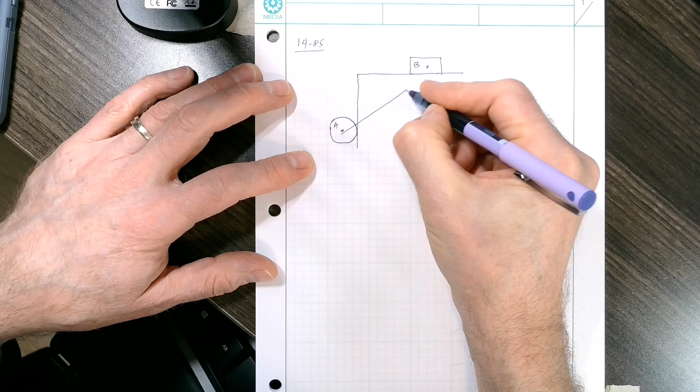And then there's a cliff or whatever. It's an edge like that, and there's a wheel here, a wheel right there, right? Like that, wheel A. And wheel A and block B are connected together with this link arm. Whoops, I missed it. Well, close enough. Okay, like that. And the system, it can move.

There's friction here, okay? In fact, that friction force is given as 20 pounds constant. That's a little bit of an olive branch from the author. Normally, of course, friction force is a function of weight and normal force, and it will also be a function of the tensile force in this angled rod and so on. But that extreme complication, which is what it would be, is headed off at the pass by just saying, look, the friction force opposing the motion of block B to the left is 20 pounds constant.

All right, let's take it. Stop asking questions, just take that. Thank you, okay? All right, the question says, by the way, there's a few known things here. Here's a little known column, okay? Weight of the block is 60 pounds. Weight of the wheel is 80 pounds. Okay. Friction force 20 pounds given.

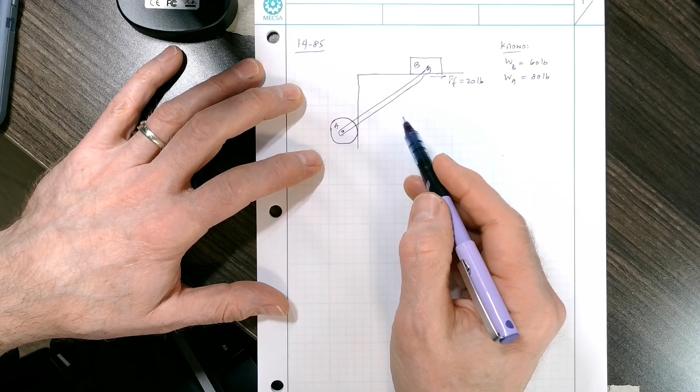Now here's the thing. It's assumed by the author. Well, it's not assumed. It can be shown in the mathematics, but it's implied in the question that this system wants to drop. A wants to drop. There's enough friction and so on, and the weights of the objects are such that if A is released, the system is held here at rest. If A is released, it's going to drop and drag B to the left. Okay, that much is implied.

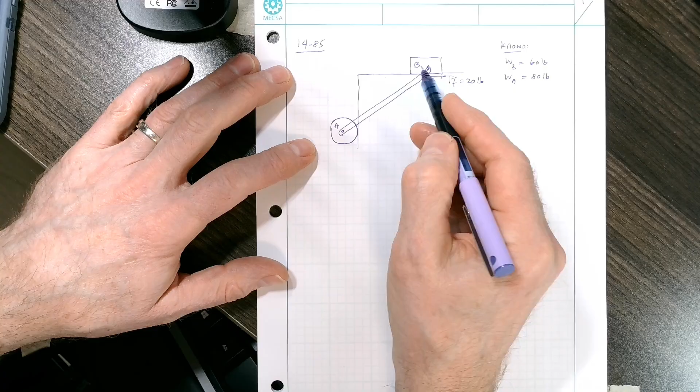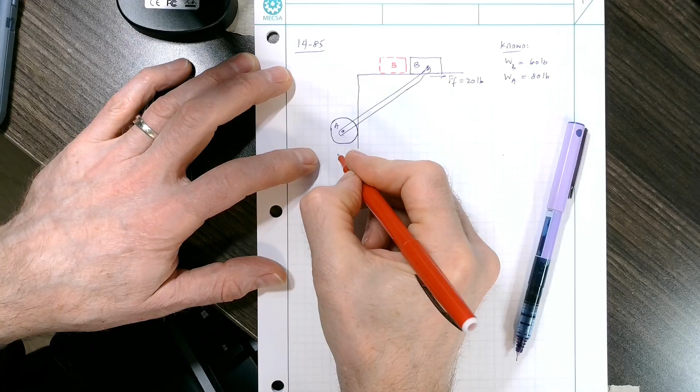In fact, it even says block B ends up to the left 6 inches like this, like that, which means that this thing is now down here a little bit, like that. Okay, and that wall's like that. Now, that's assumed. Although if that wasn't the case, the math wouldn't work out. You get a negative energy value or something, and then you say, oh, negative energy. Well, that would imply that it wouldn't be in motion. That when you release the system, it just sat there. The friction force at B was too great for this to overcome. Okay, but it's not that way. The book obviously is not going to give you a question that has nothing to calculate or no motion. So it does move. Okay.

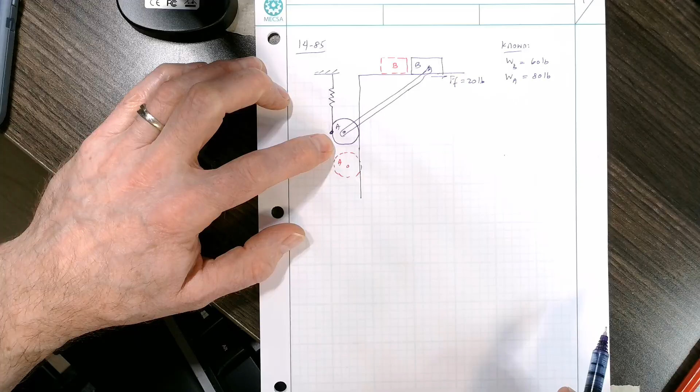But under the heading of weight, there's more. There's a spring here. As you know, there's a spring here. And there's an anchor point, and there's a spring, an extension spring like that. Okay. And now the book shows it wrapping right around, but it's a little bit confusing. I'm just going to show it anchored to the 9 o'clock position. So it's just a steel strap on the end of an extension spring and just screwed into the perimeter of wheel A at 9 o'clock position. Okay. So of course it comes along for the ride. It's going down here, and that attachment point is going to wrap around counterclockwise. It's going to end up being wrapped down here somewhere, and the result is that the spring stretches further. Okay, so the red indicates the final resting place.

Okay. Now, another thing that's otherwise implied in the question is that this wheel is rolling about the contact point with the wall. You don't know that for sure. If this wheel was made of ice and this was a block of ice and everything was wetted with water, there's nothing saying that wheel's going to roll. In fact, it could, in a bizarro sense, when this thing drops, the wheel could actually rotate clockwise because the spring is too strong, and it overcomes whatever minimal friction is at the ice-to-ice interface. Well, there's no mention of the thing being made out of ice. There's no mention of the friction coefficient here.

It's implied, not my favorite thing, but it's implied that the wheel rolls counterclockwise down the wall. Maybe the wheel's made out of rubber. Maybe it's rubber. How is that implied? Because the author reminds you of the mass moment of inertia calculation for the wheel. He says the weight of wheel A is 80 pounds, and oh, by the way, the mass moment of inertia of the wheel can be calculated from 1/2 mr squared.

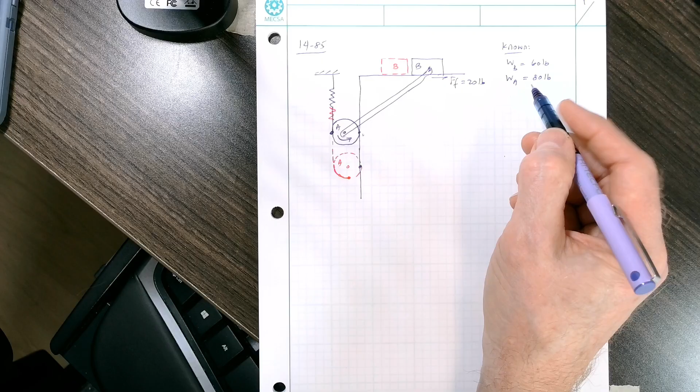Well, that right away is the author's way of saying, wink, wink, nudge, nudge, it's going to rotate. You don't need the mass moment of inertia for something if there's no rotational motion. So it's implied that the wheel rotates, counterclockwise, no less. Again, the full analysis of this in the absence of any friction coefficients would be pretty pronounced, okay? But we're going to take it with what's implied by the author. Not my favorite setup for a question, but okay.

All right. The other thing, besides the friction force being constant 20 pounds, there's one other little nice thing the author does, and that is that we're going to neglect the weight of the link. Neglect link mass. That's huge because the link is in plane motion. It's simultaneously translating slightly down, a very little bit, and rotating counterclockwise. But we don't have to account for that plane motion because the link has no mass. If the link was very lightweight, it's just in tension, you could just make the link out of a little strip of aluminum. You could argue that's not an invalid thing.

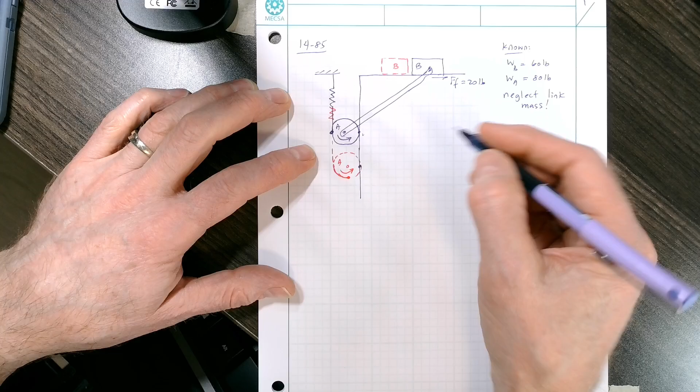So, all right, some dimensions to go on here. This initial triangle is a right triangle, and it's 10 inches tall by 24 inches that way. Then it says the block. Here's the RTF statement: find the velocity of B after it has moved 6 inches to the left. So here's the 6 inches. Another right triangle, and the link would look like this now. Well, 6 inches to the left, that means this is 18 inches. That's all we know for sure there.

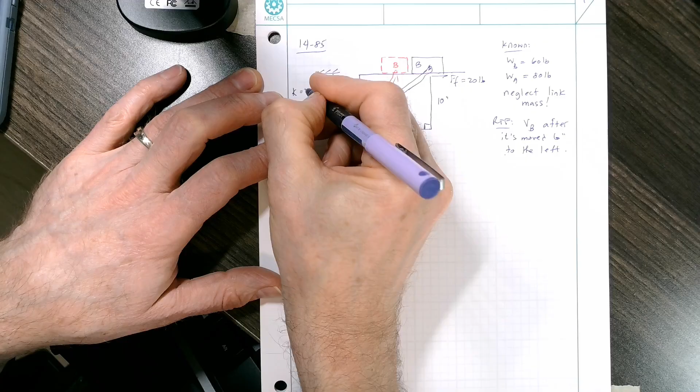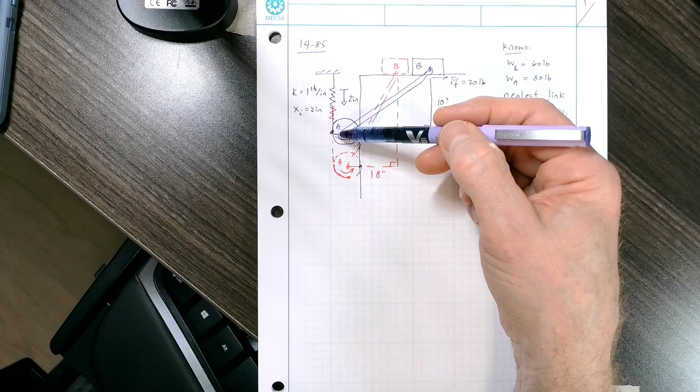One other bit of information: the spring has a spring constant of 1 pound per inch. K equals 1 pound per inch. And it's initially stretched. X initial is 2 inches. So some work has been done initially to stretch the spring 2 inches, and then it's further stretched as A progresses down the vertical wall and starts winding this strap around itself. It stretches the spring further, but we don't know how far. So the very first thing we have to do, which is take stock of what exactly we're up against, is a geometry analysis.

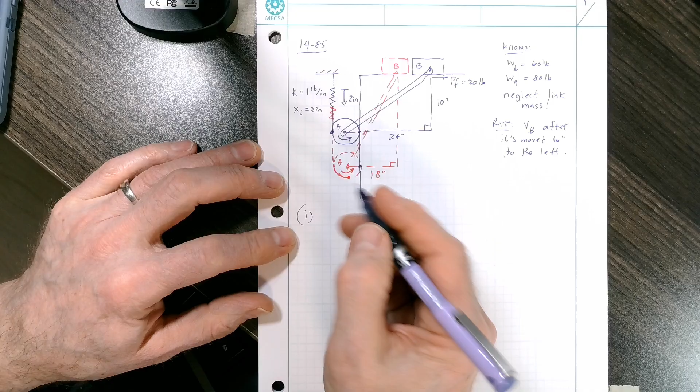First of all, the length. That's the hypotenuse of the triangle. It's common between both triangles, the red and the purple. It's the length of the link. It's the square root of 10 squared plus 24 squared, which equals the square root of 676, or 26 inches. Then the second triangle. Now what I want to know is this distance right here, because that is the change of potential energy of the wheel. We need that to track the energy. Also, it has something to do with how far the spring stretches.

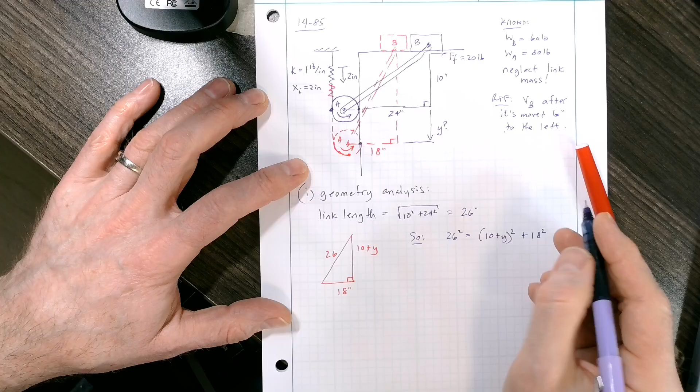So that is the red triangle. This is 18 inches, 24 less 6. This is 10 plus y, if I call that y. And this is 26 inches. So we have 26 squared equals 10 plus y squared plus 18 squared. So 10 plus y equals the square root of 26 squared minus 18 squared. You don't have to say 10 plus y; you can just figure out the triangle height. But here we go: 26 squared minus 18 squared, square root, equals 18.76 inches. Therefore, y is 8.76 inches. That's the distance that wheel A drops.

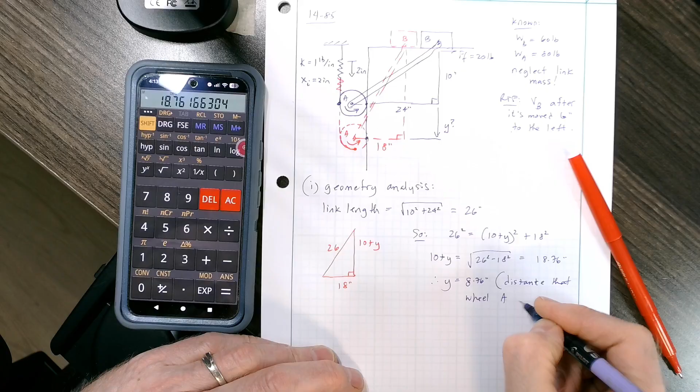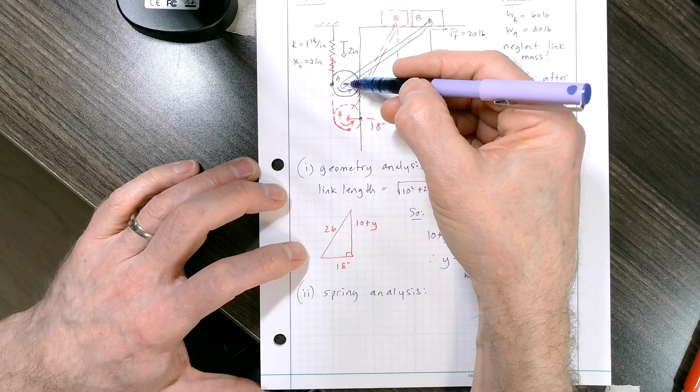All right. Well, you'd think the question's over because that was a bit of work just to get there. But it's not over. Spring analysis, okay? The spring is attached to the 9 o'clock position on the wheel. Relative to a stationary observer, the wheel is rotating about the 3 o'clock position, not the center axle, the contact point. So there's an easy way and a hard way to do this. The easy way is to realize that with the wall like this, the wheel at one point and the spring attached here, and then the next point the wheel is down here and the spring's attached here. If the wheel moves 8.76 inches down, then the spring moves twice as far, okay?

So by observation, and that would be known if you did some wheel analysis, the top of the wheel has to move twice as far as the center. But here it is with my attempt to do it with the S equals R theta analysis. Think of a link right here, a link like that, and another link in the middle, the smaller link.

Let's draw it over here. Let's do the wheel like this. There's the rotational point. Here's one link to the center of the wheel, and then imagine another pinned link that goes all the way to the other side like this. So you've got two links. Link 1 has a radius of the wheel radius, which is 9 inches. Link 2, the red link, its length is 18 inches.

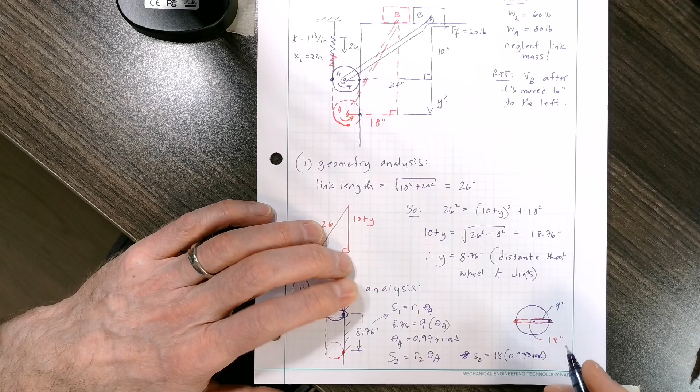That's common for the red link. The red link also moves through the same theta A. So S2 equals R2 theta A. S2 is unknown, R2 is 18 inches, and theta A is 0.973 rad. And we are going to end up with the same number initially. If you know your wheel stuff, you realize that if this wheel moves down 8.76 inches, the perimeter moves down twice as far. 8.76 times 2 is 17.52 inches. Well, here it is in mathematics.

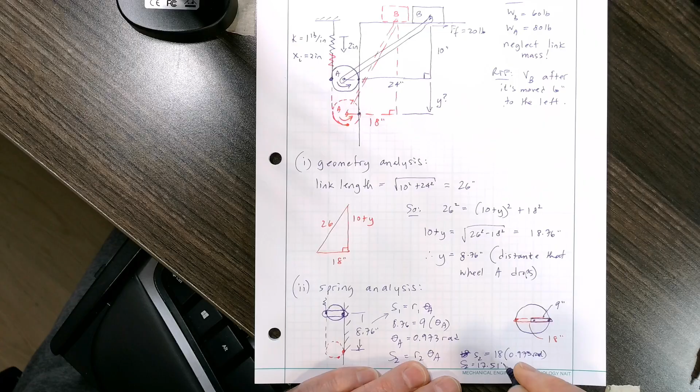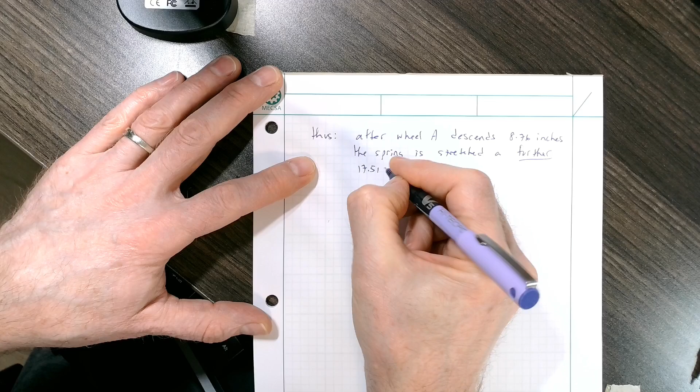S2 is 18 times 0.973, which is 17.51 inches. S2 equals 17.51 inches. In other words, the spring is stretched. So after wheel A descends 8.76 inches, the spring is stretched a further 17.51 inches, because it's already stretched 2 inches to begin with.

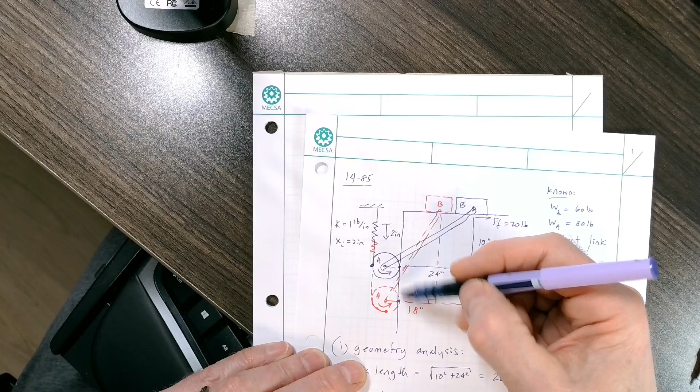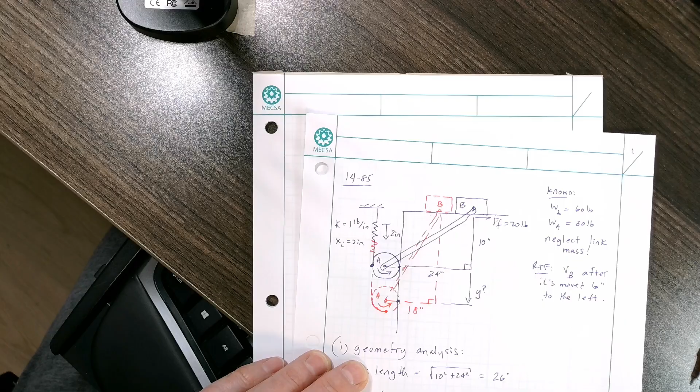Again, a 2-to-1 ratio, and that holds for all wheels, of course. It doesn't matter what the diameter or radius is. Put another way, when you drive down the street, the axle of your car might travel 1 kilometer, but the top of the tire has traveled twice as far because it has to roll around and catch up to the road again. That's sort of a Timothy Leary moment, but yeah. All right. Are we ready to do dynamics yet? Because we're really just doing kinematics and geometry right now.

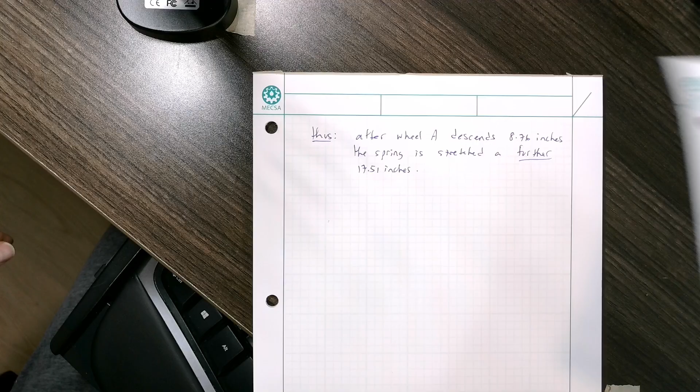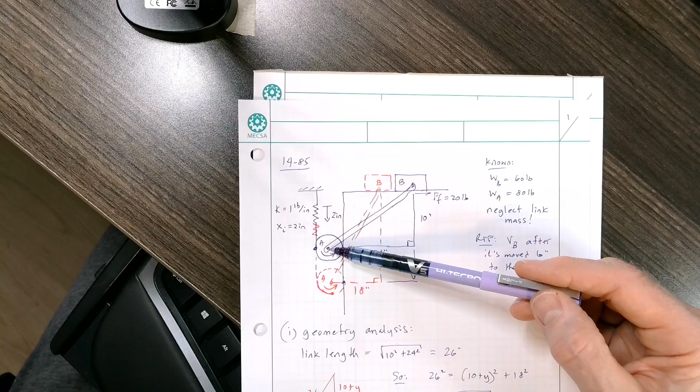Okay. Step number 3. Initial energy. Here's the energy balance, conservation of energy. Here's the system. Initial energy equals final energy. Initially, it's all just sitting there. There's no motion, so there's no kinetic energy initially. But A has a tendency to drop vertically. B will not drop, so there's no change of potential for B, but there's a change of potential for A. So initially A has energy, and then it drops down to some datum, and all of its energy is used up.

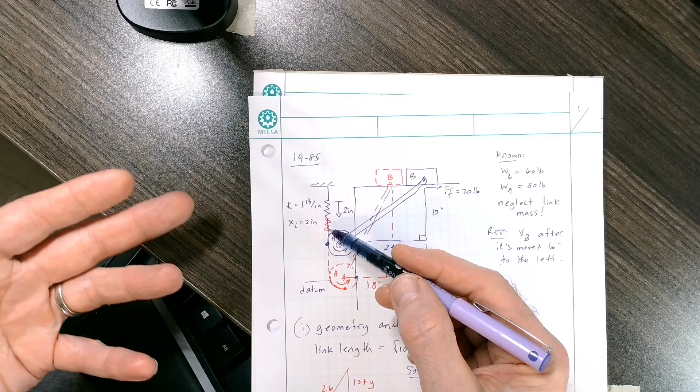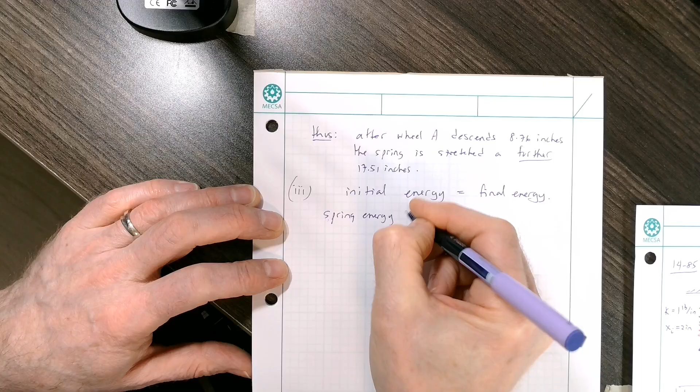Also, there's an initial spring length. It took work to stretch that spring 2 inches. That work is energy in the system. If you suddenly cut the strap that holds the spring, the energy would be released and the spring would snap. That is energy initially. So the initial energy is spring energy plus potential energy of A.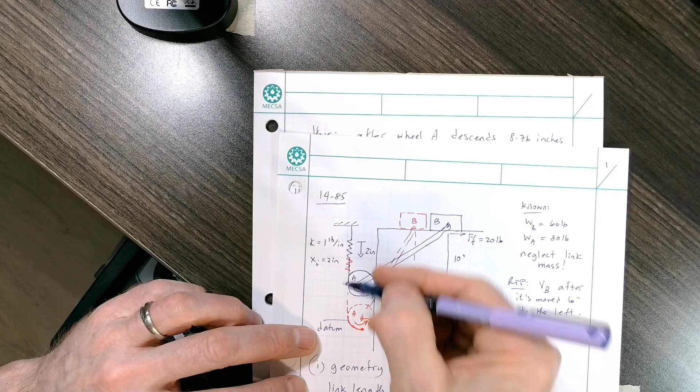The final energy, well, this thing moves down, it's rolling. Rolling and moving down, that's two different forms of motion. Plus B is moving to the left. Plus there's friction. Plus the spring. It's just the gift that keeps on giving. Spring energy plus potential energy equals kinetic energy of A, linear. It's moving straight down. It's actually in plane motion. It's a classic wheel, plane motion.

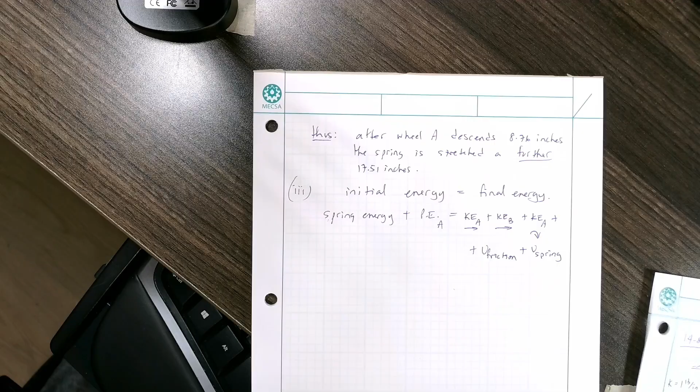Kinetic energy of A, I drew it to the right, but it's actually dropping. Plus kinetic energy of B, which is linear. It's moving to the left. I'm just showing an arrow meaning linear. Plus kinetic energy of A in the rotational sense. A is in plane motion, so it's got both linear and rotational. Plus, here it is, the work of friction plus the work put into the spring. This is a pretty doozy question. Five things.

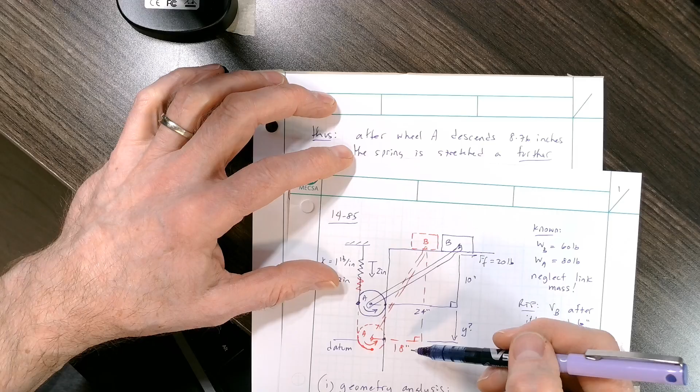It doesn't say this thing comes to a stop. It says what's the velocity of B when this moves to the left 6 inches, so when this thing drops 8.76 inches. Well, it's still moving. So it's got rotational kinetic energy, linear kinetic energy, the spring is stretching, and work is being done against friction. Five different things: 1, 2, 3, 4, 5. All right, a few things out of the way.

Spring energy is 1/2 kx squared. You know that. So here we go, 1/2 kx squared. Plus potential energy, well, that's weight times height, weight times, I'll just call it Z. Whoops, not plus, equals.

So that's those two terms right there. That's the spring energy, potential energy. Kinetic energy linear of A, well, that's 1/2 mv squared, 1/2 m_A v_A squared, right? By the way, this is the weight of A. Kinetic energy linear of B, well, that's 1/2 the mass of B, the velocity of B squared.

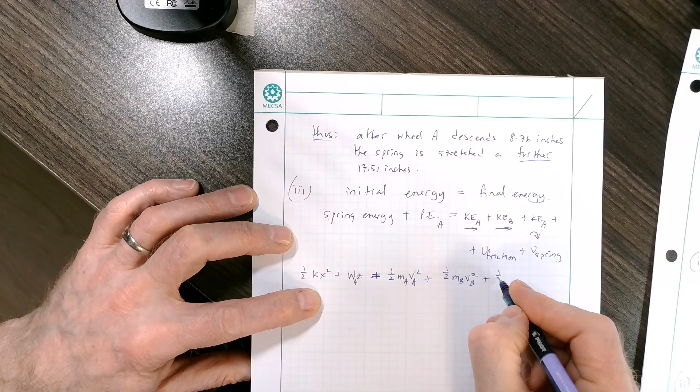All right. Kinetic energy angular of A, that's 1/2 I omega_A squared. Plus friction force, well, that's force of friction times distance, which is actually 6 inches. We know that distance. And then the work of the spring, and it's just more work.

It's just 1/2 k x initial squared, and x initial is 2 inches. And this is 1/2 k x final squared. That is borderline root canal level, but it is what it is. All right. We need k, we have x initial, we have x final, that's 17 and a half plus 2, but masses are easy enough.

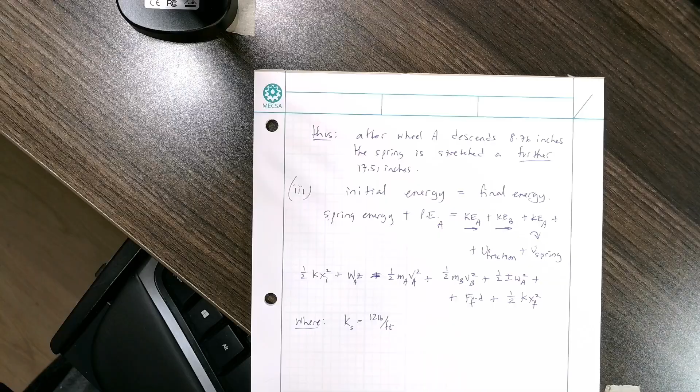Okay, let's do a couple things here though. K spring, this value, it says 1 pound per inch. Well, let's normalize everything in feet, so it's 12 pounds per foot. If it takes 1 pound to move 1 inch, it takes 12 pounds to move 12 inches, aka 12 pounds per foot. The mass moment of inertia of the wheel, they give you the equation 1/2 mr squared, right?

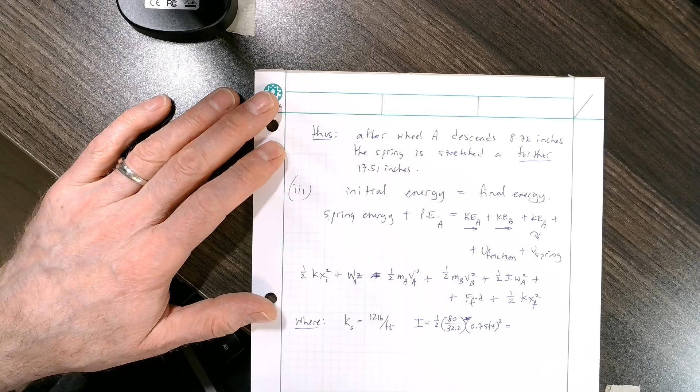So 1/2, the mass is the weight of the wheel divided by gravity, times radius squared, 0.75 feet squared. Okay, so let's get that. So some trivial laundry list things. Mass 80 divided by 32.2 is 2.48 times 0.5 times 0.75 squared is 0.699 foot pound second squared. That's the moment of inertia of the wheel.

X initial for the spring is 2/12 of a foot. It's moved 2 inches initially, and x final for the spring is 2 plus 17.51, an easy one to mix up, but it's 19.51 twelfths of a foot. The final extension of the spring is 19.51 inches. So don't make a little oops there. Other things we can clean up here. So that handles the k and the x initial.

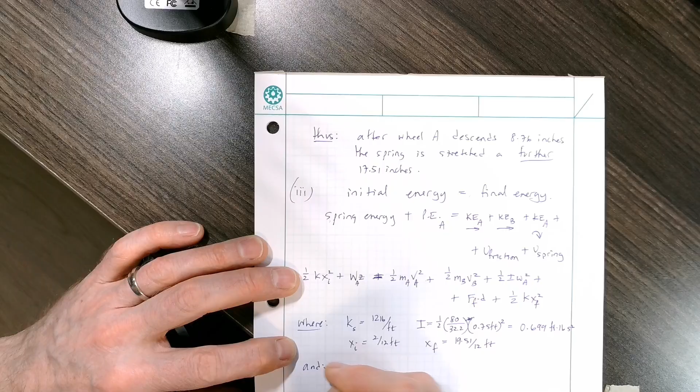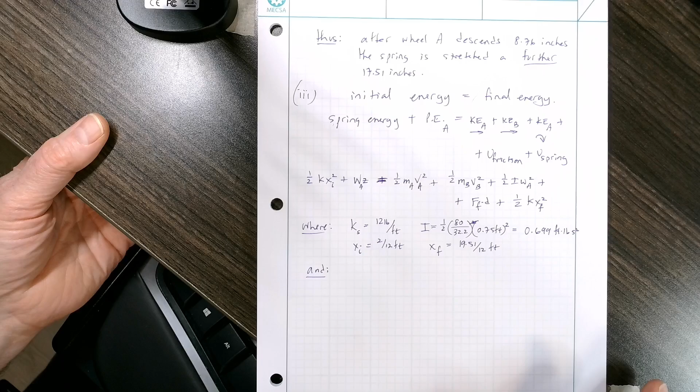We have to relate the velocities together. All right, omega_A. How to do this? It's a floating link. Floating link analysis to determine V_A. Omega_A is not omega of the link. Omega_A is omega of the wheel A, so I don't need to worry too much about that, but it looks like this.

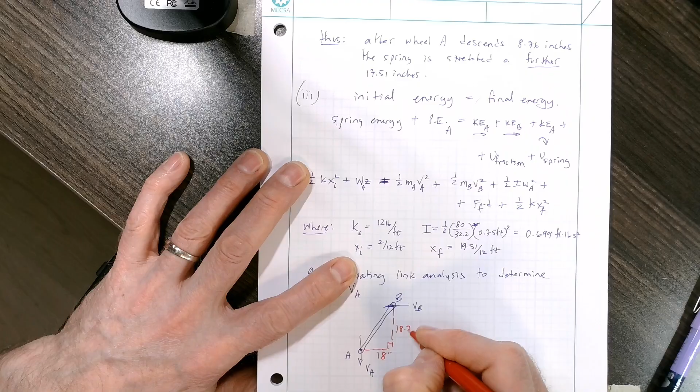Here's the link at just some arbitrary angle. V_B is straight to the left. Point B is up here, straight to the left. V_A, of course, is straight down, right? Here's point A. The dimensions here are at the final. Here's the red ink to indicate the final dimensions. Here's the triangle that defines that link. This is 18 inches, and this length here is 18.76 inches. That's the height of the triangle. And if you care about it, this is 26 inches. So there's the velocity triangle.

And you can relate V_A to V_B with the instantaneous center. Here's the instantaneous center of rotation for that link. The claim to fame of the instantaneous center is that for a given body, that's the center of rotation of the body. That's its ground zero, if you will. It's orbiting around that center right now, and all velocities on the body can be related to the IC with perpendiculars.

So the common thread here is the angular velocity of the link. The link is rotating this way, omega, about the instantaneous center. It says that the velocity of A is r omega, r_A omega. And the velocity of B is r_B omega, and the omegas are the same. This is the same omega.

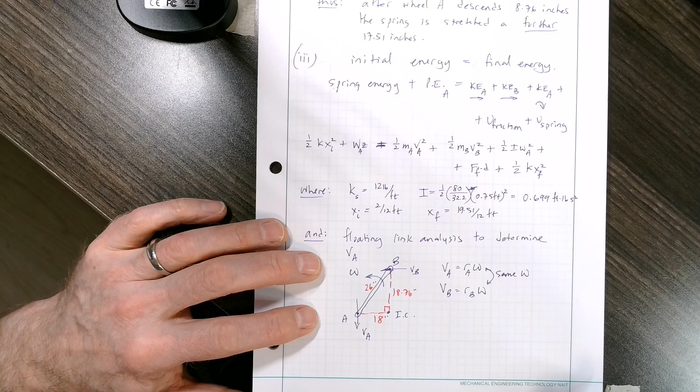So then you can set up a ratio. You see that? Okay. So you can say VA. Now what am I doing again? I want to eliminate VA. I don't want to know VA. I want to know VB. I want to express VA in terms of VB.

So I'm going to say VA equals RA omega. Well, omega is VB over RB. So I just took these two, made one equation out of it. That's R. This is V. That's R. All right, so we have VA equals RA, the radius for the instantaneous center, is 18 inches. VB is the unknown, of course, and RB is 18.76.

Okay. Therefore, VA, for purposes of substitution, is 18 divided by 18.76, 0.959. The velocity of A is 0.959 that of VB at the final, right? At the termination of the question when A has dropped 8.76 inches and so on. VA is 0.959 VB. That's going to get subbed in up here, this big old equation right here, okay?

We have got our ducks in a row. You may not believe it, but we do. Okay? Again, reminder. Initial energy, initial spring stretch 2 inches. Well, we know K, we know XI is 2 inches, 2/12 of a foot. Down here, potential energy of A, sitting there, trembling, waiting to drop. That's the weight of A times the distance through which it drops. That's an easy one. 80 pounds times 8.76 inches.

Right? All that energy then is transformed into linear kinetic energy of A, 1/2 mass of A VA squared. Well, we're going to do that sub down here. We're going to put this VA right there, and that'll make that a function of VB squared. This whole thing, 0.959 VB, will have to be squared there. Plus kinetic energy of B, moving to the left, 1/2 m VB squared. Well, that's what I want to know. That's the unknown. It's going to be here and here. Plus the angular kinetic energy of the wheel, which is 1/2 I omega A squared. We've got I figured out, 0.699.

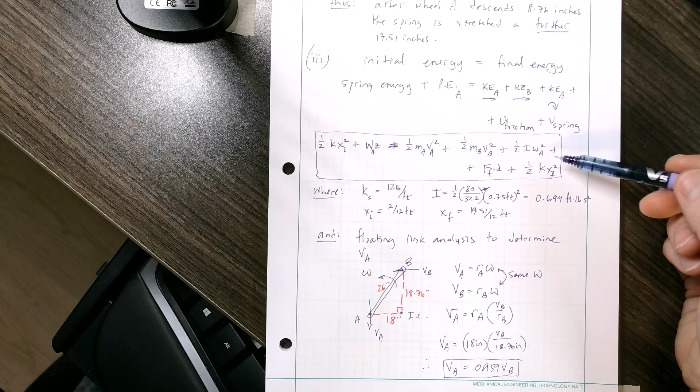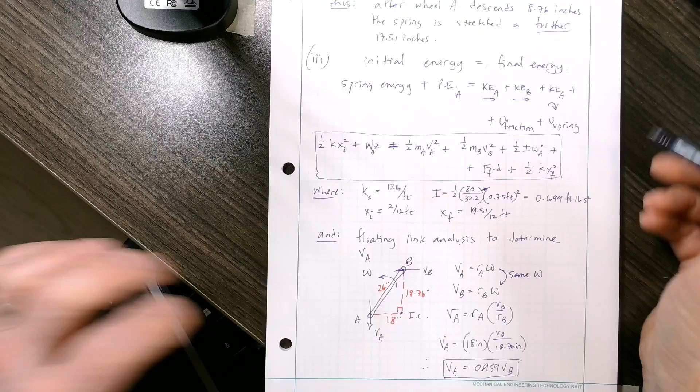Okay. Force of friction, 20 pounds times distance, 6 inches. That's easy. That's as easy as the potential energy. And then the final spring energy is 1/2 K times the total extended length squared. Okay. All right. This is page 2. Let's get the omega for the wheel.

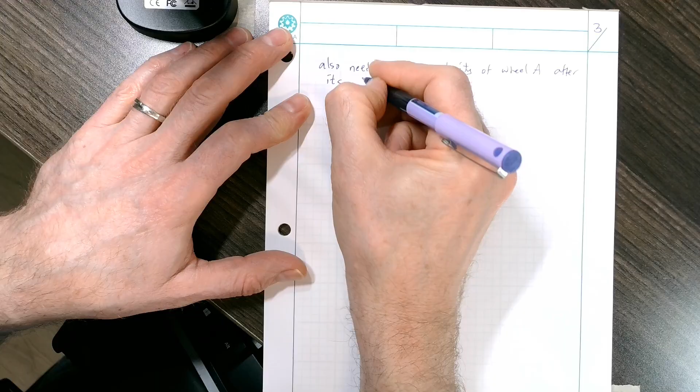Okay. Page 3. Also need angular velocity of wheel A after it's dropped 8.76 inches. Okay, that's not the same as this omega. That was the omega of the link. They're not the same. They're completely different bodies. Okay.

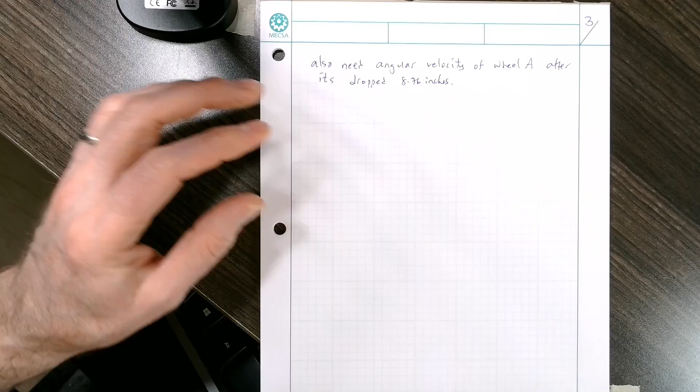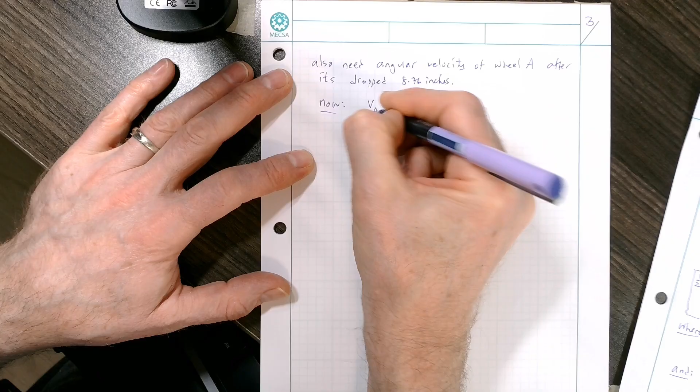Omega A can be related to the velocity of B. All right. Through this, we have this already. Oh, wrong page. Sorry. We have this already. VA is 0.959 VB. Well, let's express VA in terms of the wheel speed. Okay. So the velocity of A, the linear velocity of A, the wheel, is equal to RA omega A. Right?

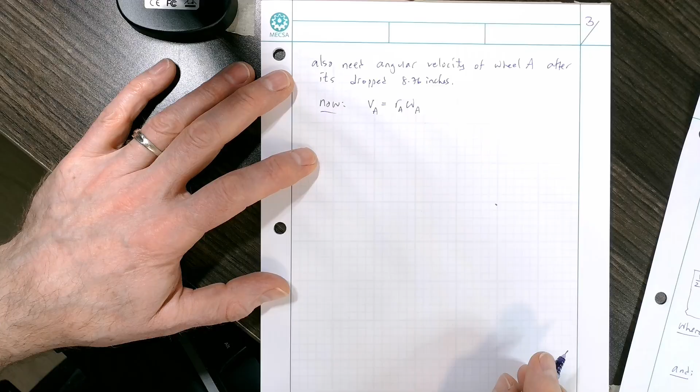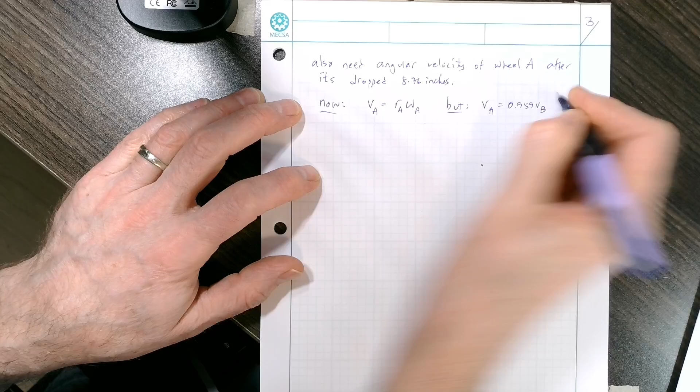But VA equals 0.959 VB. So I'm doing a substitution here. So we have this 0.959 velocity of B. That's the sub. That goes here. Equals the radius of A. Well, the radius of A, the wheel radius, analyzing this wheel as it rolls down this wall, okay, the radius is 3/4 of a foot. Not the diameter, the radius is 9 inches, 3/4 of a foot. Okay, just a simple rolling wheel analysis. The radius of A is 0.75 feet.

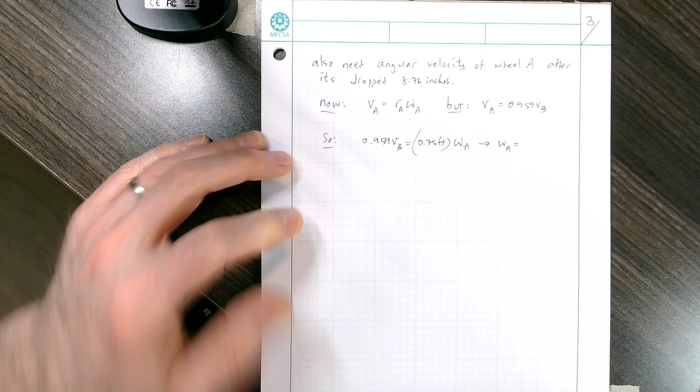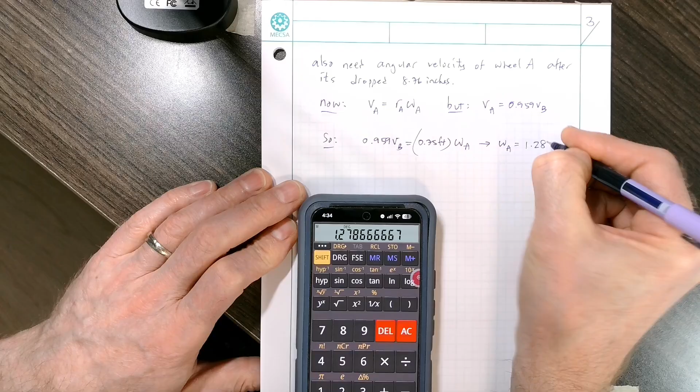Okay, omega A. Omega A equals, do the math there, 0.959 divided by 0.75. 1.279, 1.28 VB. All right, I forgot to do that on the previous page. That is going to go right here. Okay, are you with me? I'm not sure I'm with me, but all right.

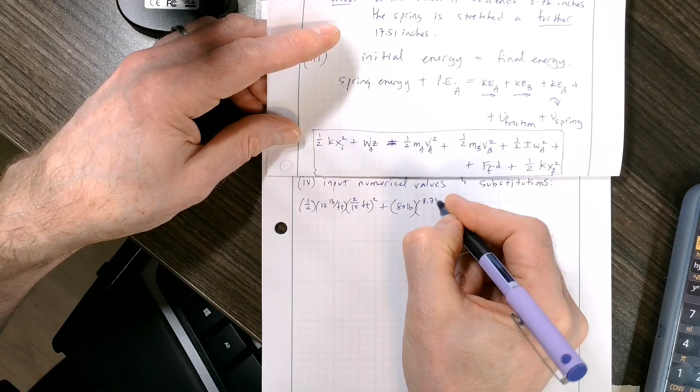Plus the weight of A, which is 80 pounds, times the distance through which A drops. That's the Z distance. That's 8.76 twelfths of a foot. Okay, that's the initial energy.

Okay, that equals, and the final energy is going to be a bit of a mess. I'm going to put it down here. Here's the final energy. One half times the mass of A. This is the linear kinetic energy of A. Mass of A, 80 over 32.2. I'm going to leave off the word slug right there. Velocity of A, oh, there's the first sub. That is 0.959 VB, 0.959 VB all squared.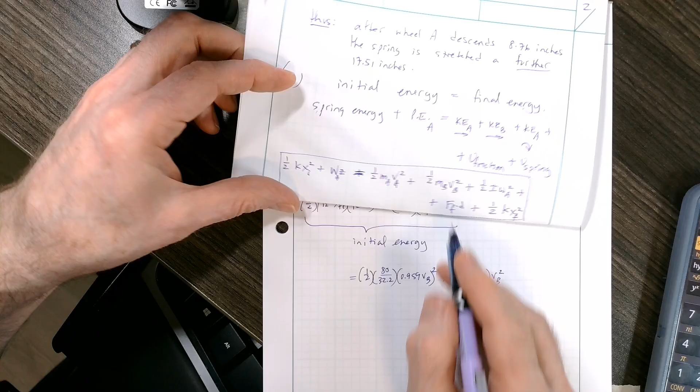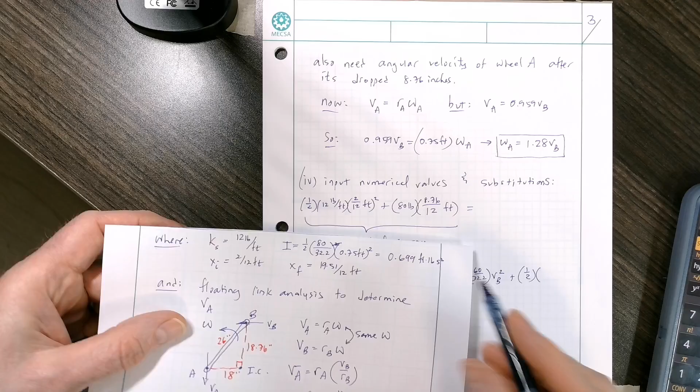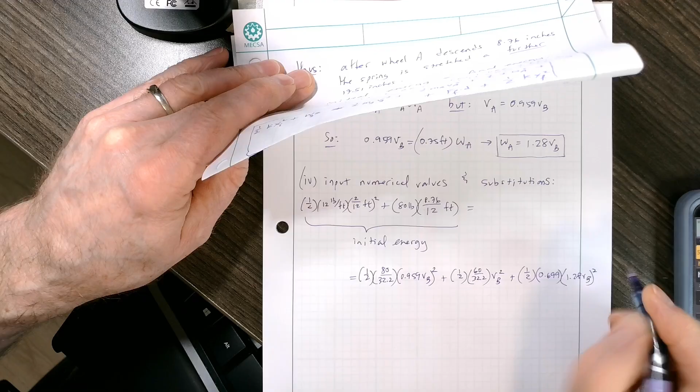0.699. I'm going to leave off the units. 0.699 foot-pound second squared. One half I omega A squared, omega of the wheel, 1.28 VB, all squared. There's the next sub. So that's one half I omega A, omega of the wheel, all squared. One half mass moment of inertia of the wheel, omega A, which we've gone to the trouble of expressing in terms of VB, all squared.

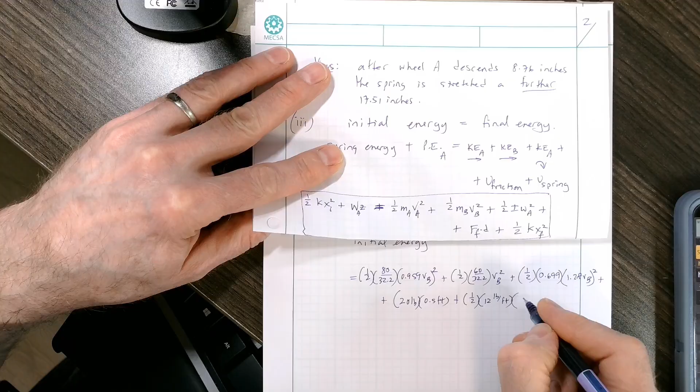That's three kinetic energies, 1, 2, 3, plus the friction force, 20 pounds times 6 inches, 0.5 feet. That's the friction energy. Notice there's no such thing as a negative energy. It's just all positive. It's one easy thing about energy. Plus the final spring force, 12 pounds per foot, one half, X final, 19.51 twelfths of a foot squared.

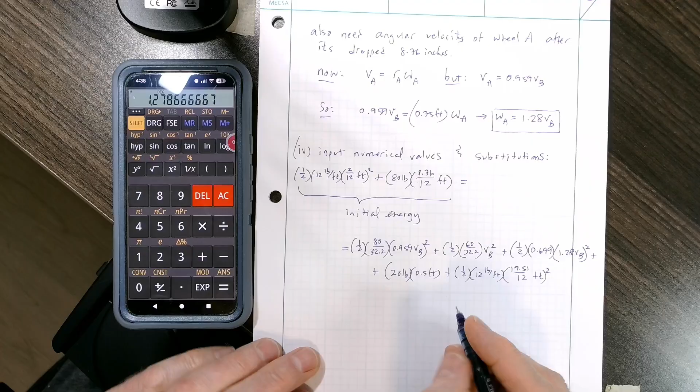Holy smokes. Not going to lie. Here's the initial. I'm going to start up here and do some calcs. 2/12 of a foot. Here we are. I'm just doing these calcs and I'll write the numbers down here. 2/12 of a foot squared times 12 times 0.5. Initial spring energy 0.167 foot-pounds in the spring. Plus initial potential energy, 8.76 twelfths of a foot, 0.73 times 80 pounds, 58.4.

So an awful lot of energy, 58.4 foot-pounds of potential energy in the block. Okay, that equals the kinetic energy of the linear motion of the wheel. 0.959 squared times 80 divided by 32.2 times 0.5. 1.142 VB squared foot-pounds of energy, plus the linear kinetic energy of block B.

That's the mass of B, 60 divided by 32.2 times 0.5, is 0.932 VB squared, plus the rotational kinetic energy of wheel A. All right, that's 1.28 squared times 0.699 times 0.5, is 0.573 VB squared, plus the work of friction, 20 pounds times half a foot is 10 foot-pounds into friction, plus the final spring energy, 19.51 divided by 12, 1.626 feet squared, times 12 divided by 2, 15.86 foot-pounds in the spring.

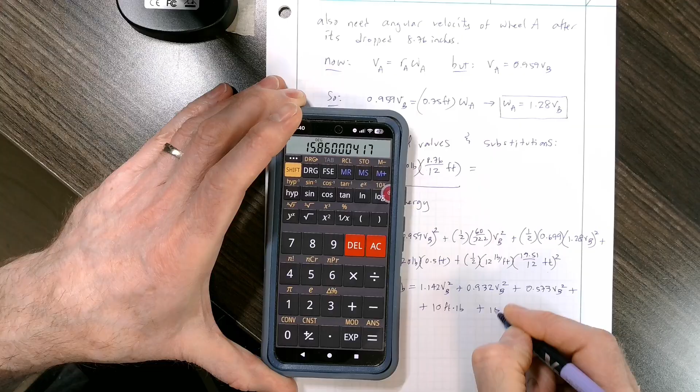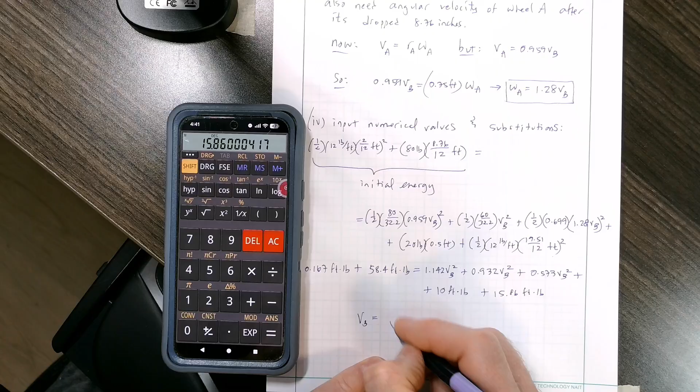So the spring doesn't start off with a whole lot of energy, 0.167, but it ends up with a lot of it, because you're squaring the stretch. The further you stretch it, the more it takes. So I think that's good. VB equals, oh yeah, simple calc. Here it goes. Add up all the constants. VB equals the square root of 0.167 plus 58.4 minus 10 minus 15.86 is 32.707.

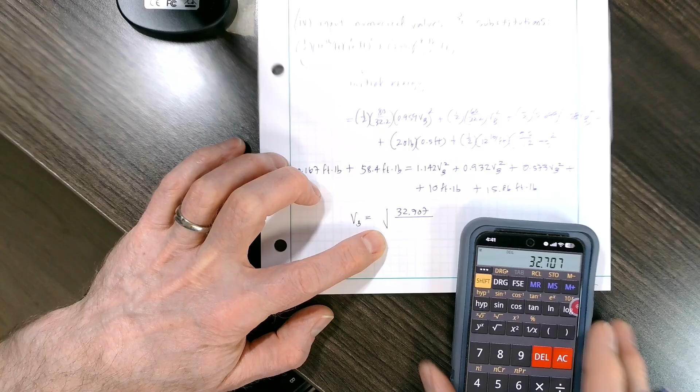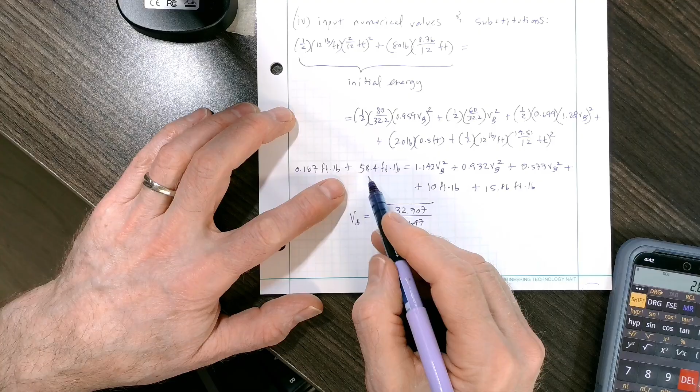That's the constant. And then divided by the constant in front of the VB squared. I'm not spending a lot of time on the math here. In front of the VB squared, I have 1.142 plus 0.932 plus 0.573 equals 2.647. So again, I collected the constant on the left, VB squared is on the right. I flipped them. I put VB here as a square root of that. Invert that times 32.707, square rooted, 3.52. VB is 3.52 feet per second to the left.

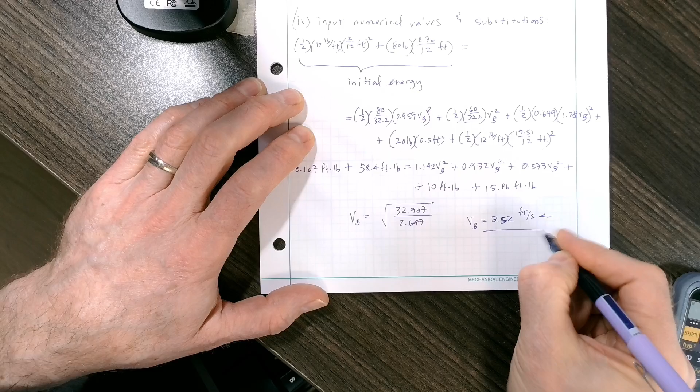I hope you enjoyed that. That's sarcasm, but there is so much going on in this question. If you can just understand bits and snips of it, that would be good. To be honest, if I did this on an exam, I doubt I would get the right answer. I would probably forget something or make an incorrect calc error somewhere. But that's a 3-page example. Very challenging, got to tell you. It's got everything in the kitchen sink as far as energy and kinetics and so on.

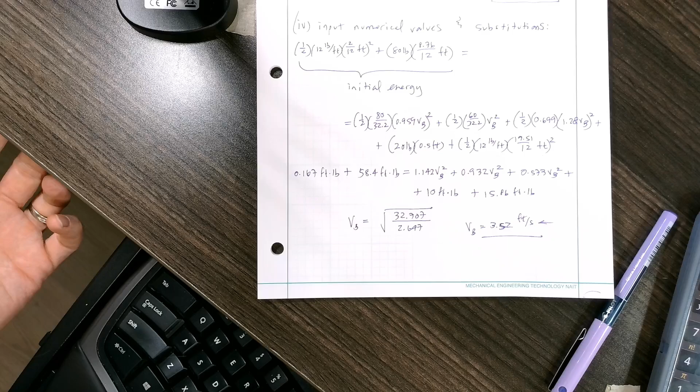Do your best. Look at it a few times. Just make sure you understand how I related the velocities to the angular velocities and so on. That's a critical skill in any question. You have to be able to relate a linear velocity to an angular velocity to eliminate unknowns. And the spring energy, make sure you know how to process that. That's also somewhat tricky.